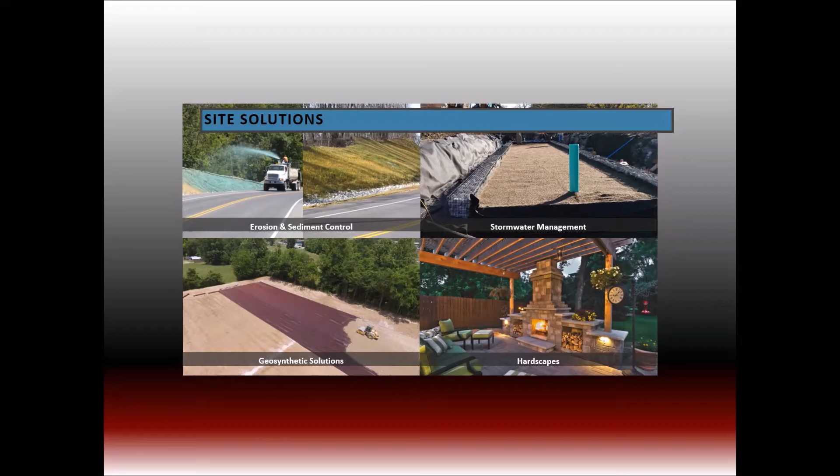We do a lot more than just stormwater management and vegetated solutions. We do a lot of erosion control and sediment control. We have a lot of hardscapes in the way of patios, retaining walls, and outdoor living. And our geosynthetics division keeps us going every day. So we have trucks and warehouses full of rolled products that have our erosion control products, TRMs, geosynthetics and geogrids, our BMPs. We help with a lot of SWPPP maintenance and compliance. So there's a whole lot of things that we offer.

One of the things we're blessed with is our warehouse staff and our trucking. We have a fleet of trucks, large and small, that can deliver a vast variety of products to your site when you need it. That makes us a one-stop shop for a lot of contractors. So we have all of our local companies that you know that you could reach out to. I'm available for any of these companies, any of our states.

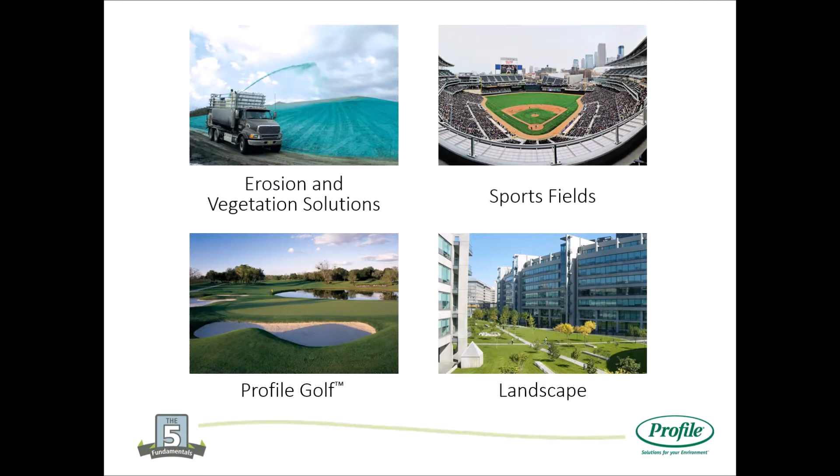At Profile, we work in a few different green technology areas. Our main focus and what we'll be reviewing today is erosion and vegetation solutions. However, we do develop solutions for sports fields, Profile Golf, as well as landscape and horticulture. But today we're really going to be focusing on erosion and vegetation solutions.

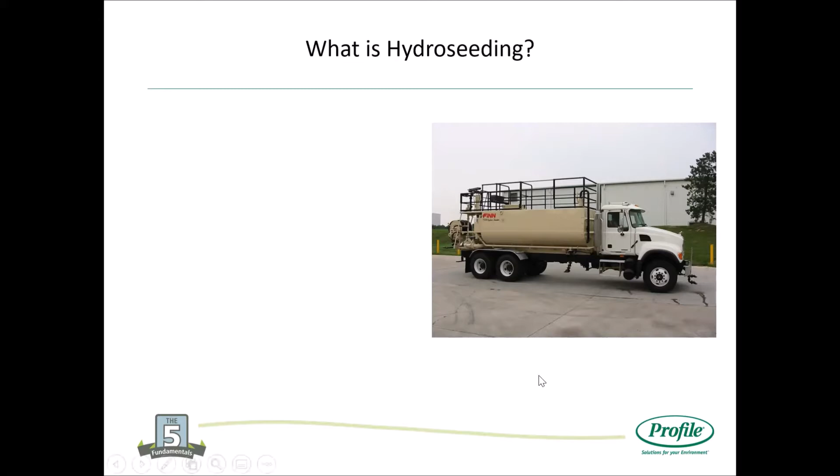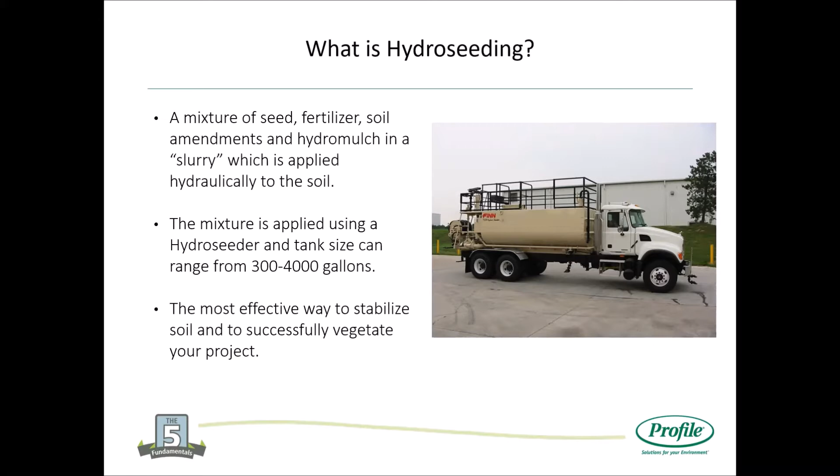I'm hoping everyone here today is pretty well versed in hydroseeding, but just in case, let's make sure we're all on the same page. When I'm talking about hydroseeding, we're talking about a mixture of seed, fertilizer, soil amendments, and hydromulch, which can be mixed into a slurry with a hydroseeder machine, then hydraulically applied to the soil. This slurry can be applied with a wide range of equipment suited for different size projects, and it's an extremely effective way to stabilize your soil and successfully vegetate your project with one application.

Today I'm going to go through our 5 fundamental processes, which is essentially our best management practice for reclaiming erosion projects. First, creating optimal soil conditions. Second, picking appropriate plant species for your site. Then selecting the correct erosion control material. Number 4, ensuring proper installation. And 5, follow-up inspection and maintenance.

Today I'm really going to hone in on 1 and 3, but I will say all 5 of these fundamentals are extremely important. I want to make sure to stay within the hour so you guys can go get your shamrock shake or pick up your green beer today. So with that, we'll get rolling.

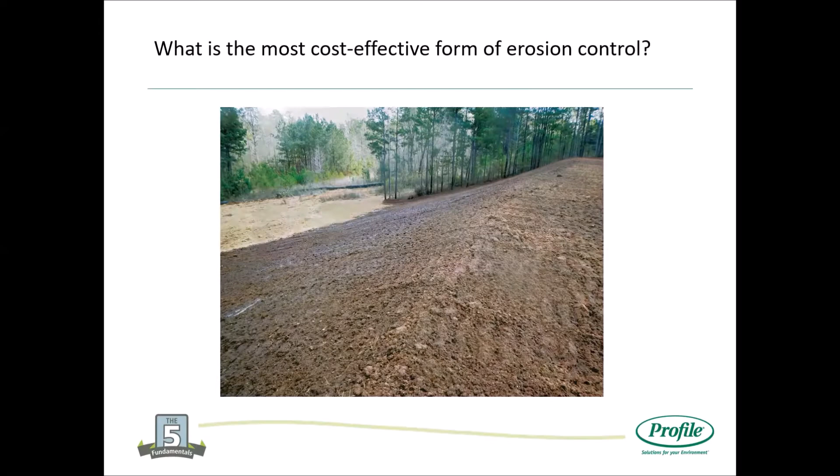If any of you have seen a presentation from Profile before, this should look pretty familiar. One of the questions I really like to start with is, what's the most cost-effective form of erosion control? I'm hoping you guys are jumping up and down out of your seats at home, but the answer we're really looking for here is sustainable vegetation.

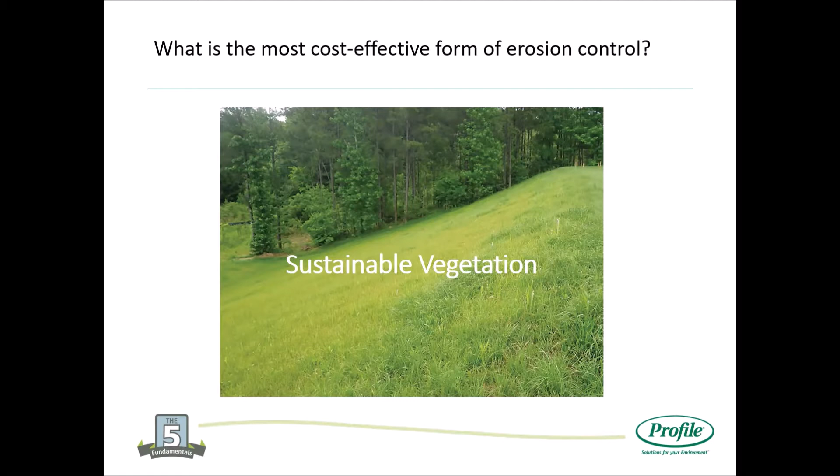This is vegetation once it's been established, it's able to persist through nutrient cycling. And in order to do that, we're going to need healthy soil.

Profile is a manufacturer of erosion control products, so why am I talking about soil health? Well, we've determined that the most cost-effective form of long-term erosion control is sustainable vegetation. With that long-term goal, that's the minimal cost, low maintenance solution. We need that healthy vegetation with nutrient cycling, diverse species, prolific roots that keep the sediment in place. But we can't achieve those unless we start with healthy soil as our foundation. This is necessary to support vegetation establishment and allow that vegetation to come back season after season.

So we know this is the foundation, but how can you tell if your soil is healthy? Can you grab a handful and see the nutrients or pH? Unfortunately, we can't. So the first thing we always recommend on any sort of reclamation project is getting a soil test.

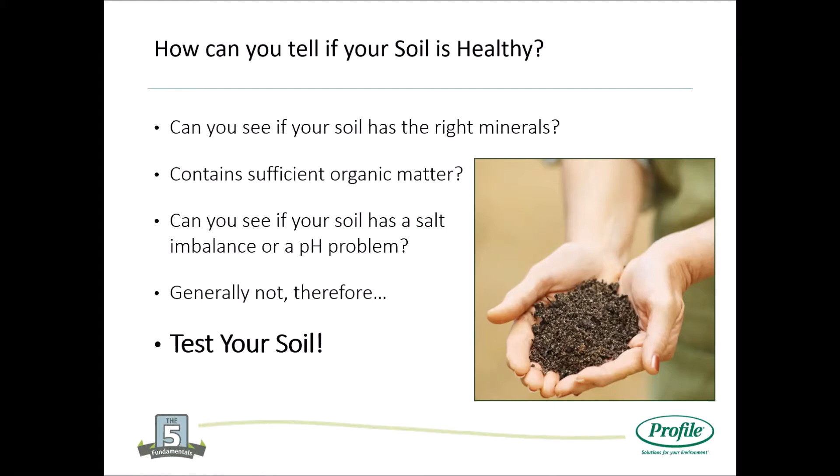That takes us into our first fundamental, which is creating optimal soil conditions. We need to make sure we have healthy soil to support that vegetation and long-term goal. By doing the soil test, we can evaluate our soil fertility. A soil test looks at agronomic potential, not geotechnical stability, so we can figure out if and what amendments are necessary to improve soil health. By doing this soil test, we can diagnose any potential issues and prescribe solutions for that specific site. This is a great way to set up realistic expectations, see if there's anything that's going to be a hindrance on the front end, and predict your desired outcome.

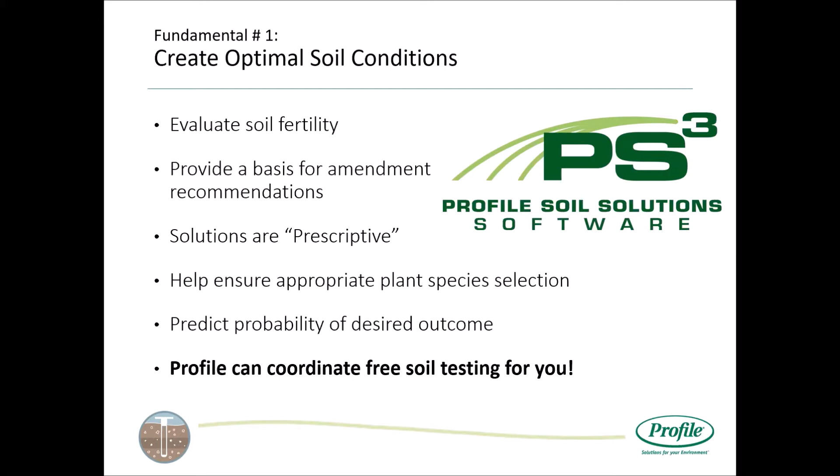At Profile, we understand how critical this is to the success of your site, so we actually provide free soil testing for reclamation projects. That's done through PS Cubed, our Profile Soil Solutions Software.

So I mentioned we're doing an agronomic soil test. What do we need to look at? Here we can see some of the general parameters we typically like to review from a soil test: water, salts, pH, our macro and micronutrients, as well as any potential heavy metals or toxicities.

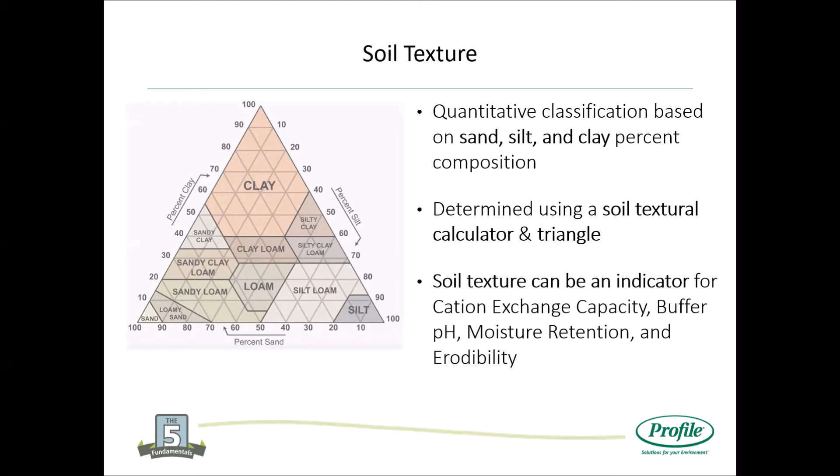Organic matter is going to be a really key parameter that I stress on here today. Also taking a look at our soil texture, so our breakdown of sand, silt, and clay. This is a key indicator for our cation exchange capacity, as well as erodibility. So certainly something to keep in mind.

But like I said, we provide free soil testing through our PS Cubed software. Here's just a quick example of what that looks like. As you can see, it's a pretty robust analysis going through all those parameters that I previously shared. Goes pretty well in depth.

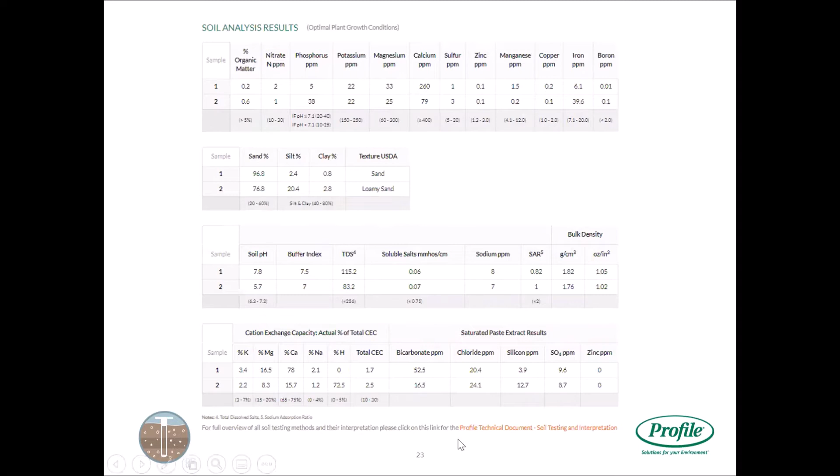We do all of our testing through a third-party laboratory. They upload the results directly to your account, but along with providing results, we also provide prescriptive recommendations as well. So depending on the range that your parameters fall in, we can then prescribe soil neutralizers if we need to modify that pH, or growth stimulants, biotic soil media—these are going to be determined on the salt levels and organic matter in your soil. But here we can really see how we can use this soil test to review our site.

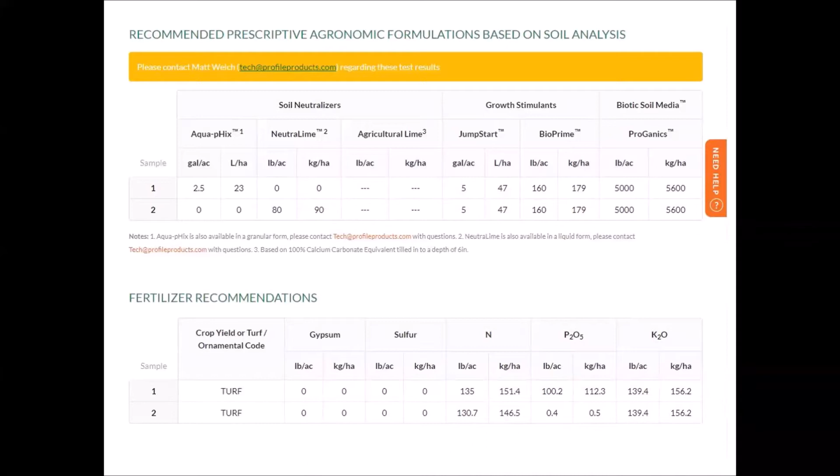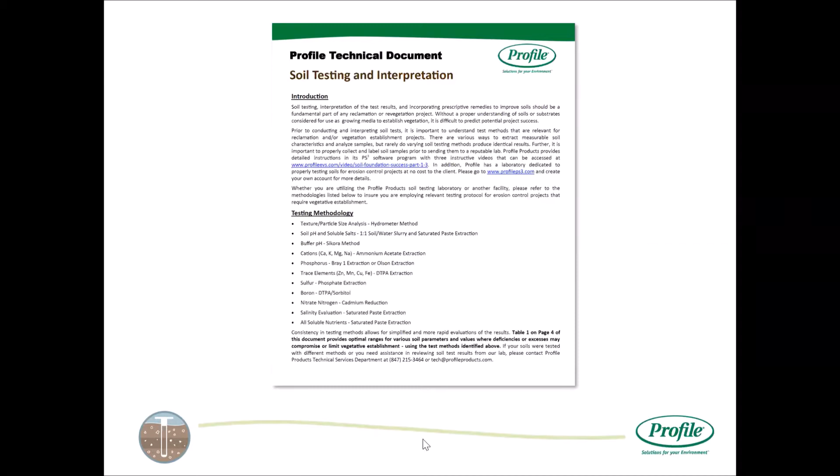And then prescribe specific solutions to improve our vegetation outcome. But also with those results, it's not very helpful if you don't know what you're looking at. So we do have a soil testing and interpretation guide linked with all of the results. It goes through our testing methodology and gives you a little bit more background on what you're reviewing. Or if you have any questions, call me. That's my job. I'd be more than happy to review these results with you and see what we can do to improve the potential outcome for our sites.

So first fundamental: getting that soil test, submitting it, you get it back and you see we're kind of lacking some nutrients. So how do you actually go about fixing poor soil? Here are the pretty common solutions: incorporating a starter fertilizer with your hydraulic slurry, soil neutralizers when necessary, increasing organic matter—as you'll see soon, this is a key component of healthy soil. That's a pretty common approach, as well as incorporating growth stimulants and enhancers.

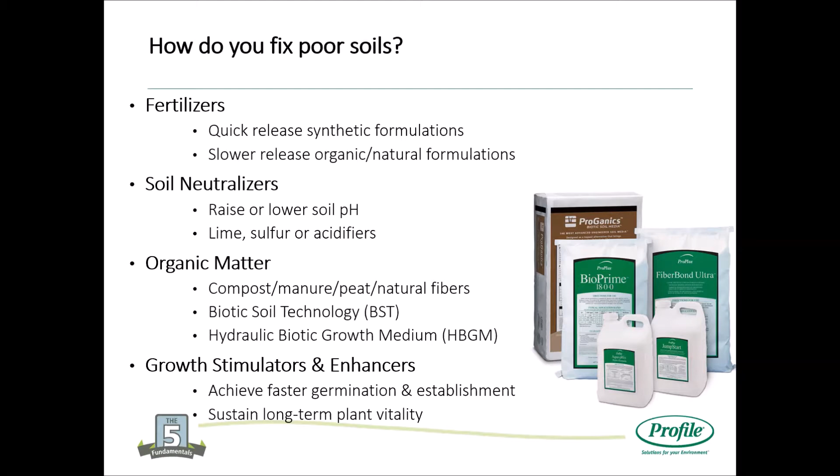So I do want to take a quick minute and touch on pH, because whenever I get a soil test back, the first two things my eyes go to are pH and organic matter. pH especially, because it can sometimes be a silent killer out on your job—second to moisture, this is going to have the biggest impact on nutrient availability to your vegetation. We typically want to be within a 6.3 to 7.3 range, because this is really where your nutrients are going to be most available for uptake.

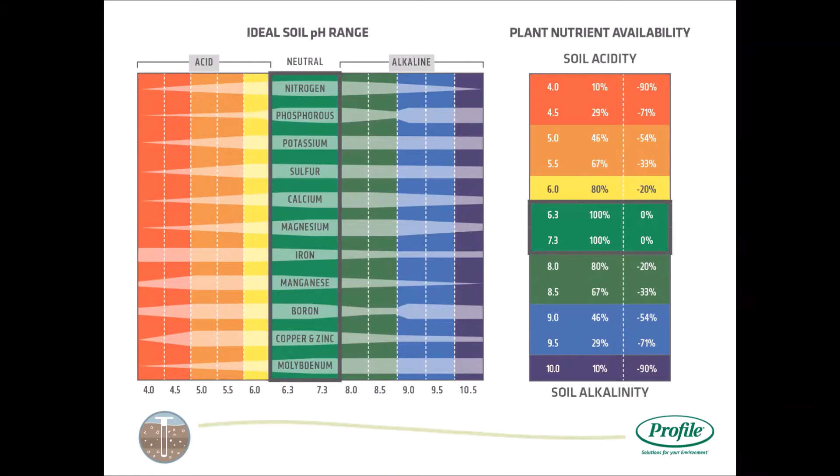But as we skew more acidic or more alkaline, we can see that some of those nutrients become less and less available. Another way of thinking about it: if you look at the chart to the right, let's say our soil test comes in a little acidic at 5.5. With a pH of 5.5, only 67% of nutrients are going to be available for uptake to your plants, or 33% simply aren't available because of the pH. So think of buying all this fertilizer and dumping 33% away because it's wasted. Whatever you can do to modify that pH when you're seeding is going to have huge impacts on your vegetation establishment.

And this is what we start every job with, right?

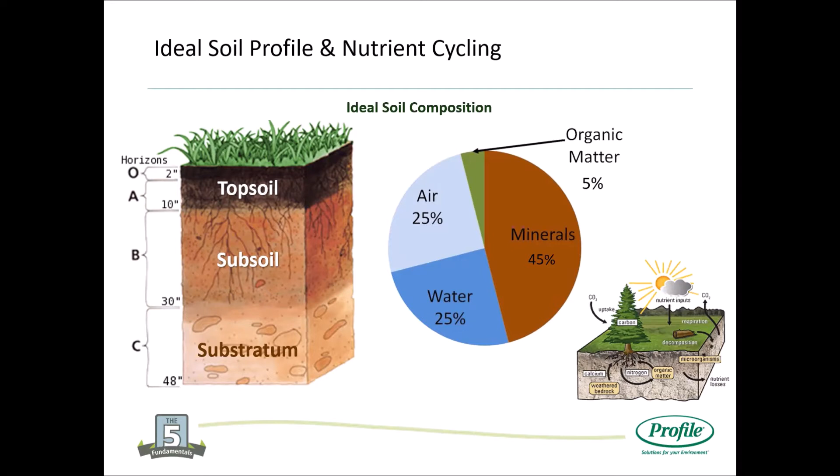Absolutely not. Unfortunately, on almost all construction sites, that topsoil layer is the first thing stripped away. It's stripped away, sent off to another job, potentially stockpiled if there's room, or it was never there to begin with. So when we're wrapping up a job and getting to the seeding component of the spec, what we're left with is commonly our B and C horizon.

By doing that soil test, we see that our organic matter is more times than not well below 1%. And we're dealing with, it's pretty common to see high salt levels. Depending on the type of job, we could be dealing with mine waste, industrial waste, or CCRs. So overall, not nearly as nice a starting position as the profile we saw in the previous slide, right?

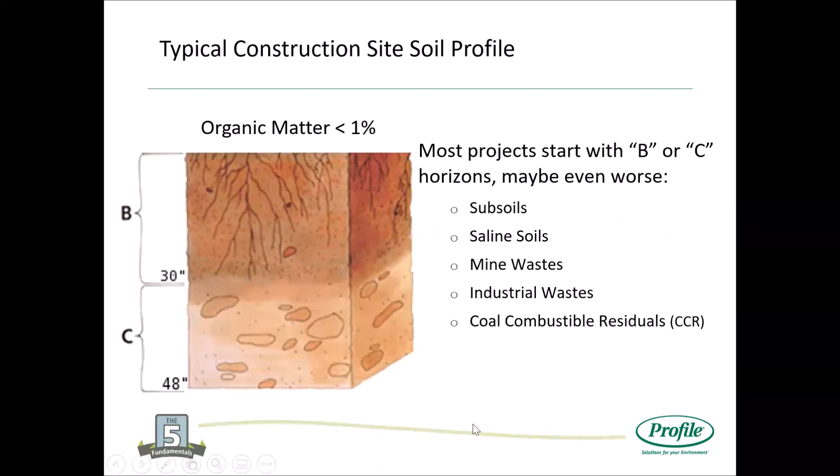So if this is our starting point and that soil test shows our organic matter is low, how do we increase it? These are the pretty common industry solutions right now, most commonly topsoil and compost. Hauling in this material to your site and spreading or incorporating it is a pretty common practice to increase your organic matter. But with that, it can be pretty difficult to find quality material, or something within your budget. It can be too far away, or unavailable.

So that led to two typical solutions we were seeing. If there's no quality material or it's too costly, we were seeing people just using the existing subsoil and hoping for the best, or a term I've heard quite frequently, the spray and pray approach. It's got a nice ring to it, but it doesn't necessarily give you the best results, right? It's going to be one of the primary causes of project failures.

Or the other option was they would have to take a hit to the budget and haul in and spread the topsoil or compost, which was pretty common, but a crazy solution if you're having to spend all that extra money just to raise your organic matter.

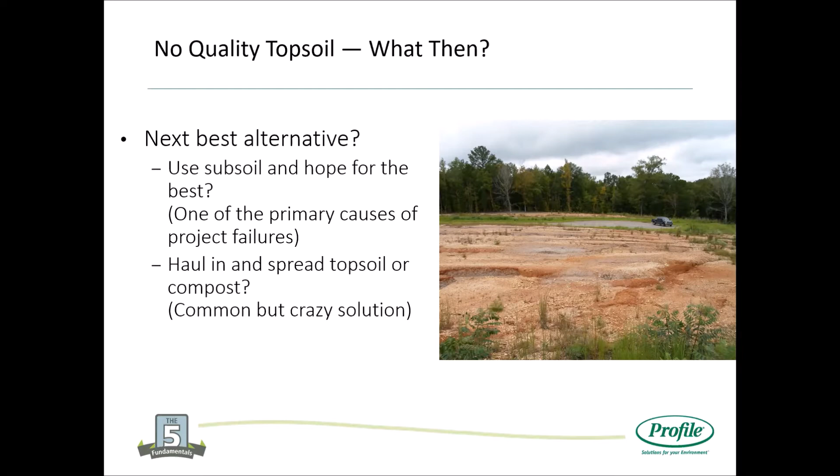So seeing these common issues and common approaches within our industry, that's what led Profile to develop a hydraulically applied biotic soil media. This hydraulically applied solution is designed as an alternative to compost or topsoil, designed to jumpstart the soil's biological activity in depleted soils. So using our standard hydroseeder that we saw earlier in this presentation, we can now use that for erosion control and also increasing our organic matter.

Given the nature of this application, it's going to reduce site traffic and improve site safety, dramatically reduce installation times, and is much easier and safer to apply on slopes. And since the launch of this technology, we have proven performance qualitatively and quantitatively, improving vegetation establishment equal or better to incorporated compost and imported topsoil.

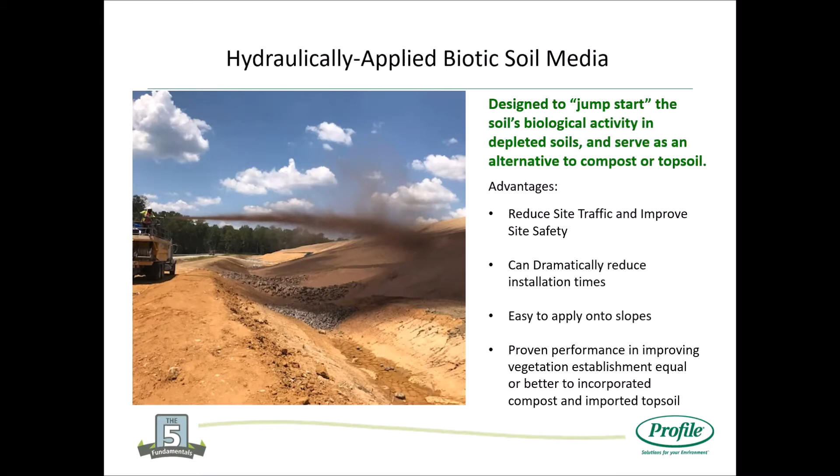So the product we manufacture is ProGanics Biotic Soil Media. This is a concentrated formula since it's hydraulically applied. We achieve this concentrated high organic matter through renewable, thermally refined bark and wood fibers. These fibers are phytosanitized, provide very high organic matter, and you lose the risk of incorporating weed seeds or pathogens as it goes under this high heat process.

From there, it is loaded up with soil building components: our porous ceramics, biochar, beneficial bacteria, endomycorrhiza, humic acid, seaweed extract. These all work together to help rebuild your soil profile.

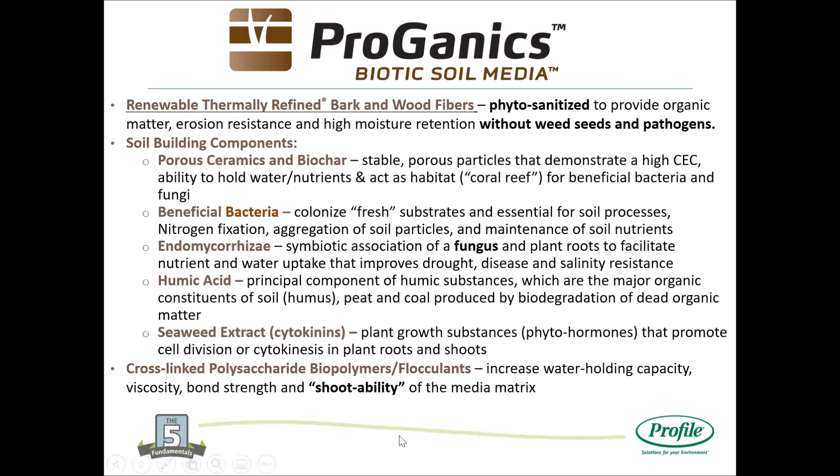We also have a polysaccharide biopolymer, which helps with the shootability, as this is a hydraulically applied solution. So, a very concentrated formula since it is hydraulically applied. Think of it as spraying the fertility of a topsoil just without the sand, silt, and clay.

This ProGanics can then interact with the existing sand, silt, and clay on the current substrate. Once it's been applied, it's going to improve the soil chemistry. Over time, that helps improve the structure and texture with the increased organic matter from the wood and bark fibers. And with the soil building components, it creates a more ideal growing platform for that vegetation to take off and allow that subsequent nutrient cycling process. So essentially, over time, applying this type of technology provides the soil with all the ingredients to jumpstart this process and rebuild your topsoil layer in place over time.

One of the great benefits with this technology is that it's manufactured to a specification. It comes prepackaged in bales, just like our hydraulically applied erosion control products, but you're going to have a consistent product, bale after bale, 365. That's certainly one of the concerns with some of the other options within our industry, but this is a consistent solution. Break it up into your hydroseeder, incorporate your fertilizer, seed, or other amendments, mix up this slurry, and spray it out onto your site.

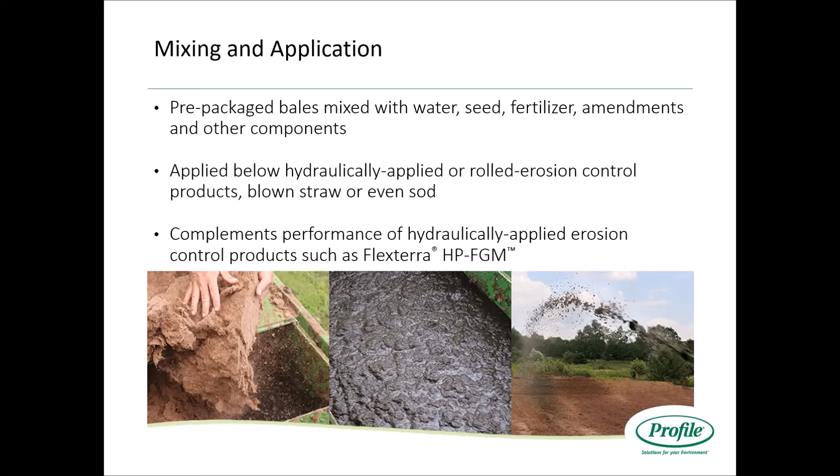There are certainly a lot of considerations to regenerate your soils. Probably the industry leading solutions right now are topsoil and compost, and they certainly still have a place within our industry. But I'd like to stress, the next job you have where you're struggling to establish vegetation, and organic matter is low, consider ProGanics Biotic Soil Media as an alternative to really start rebuilding that soil. It's a consistent product, easy and safe to apply on steep slopes, and no concerns with bringing in outside weed seeds or pathogens.

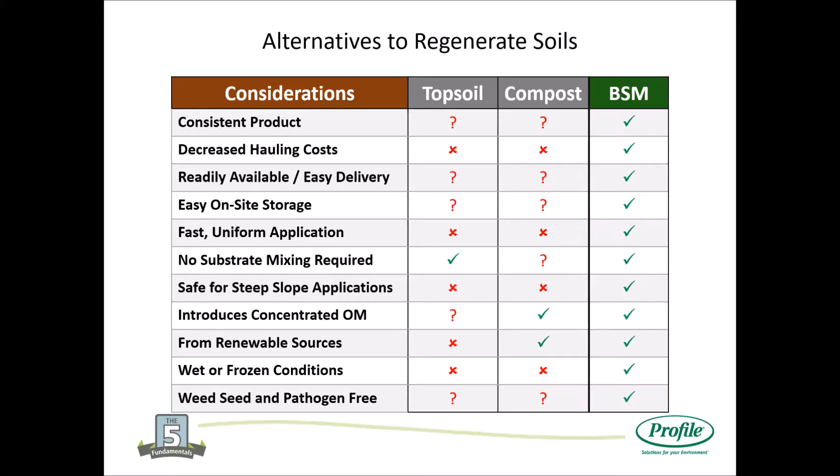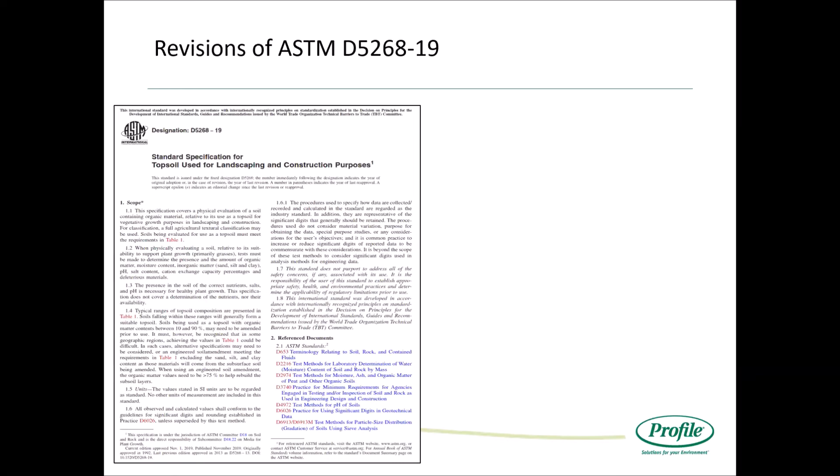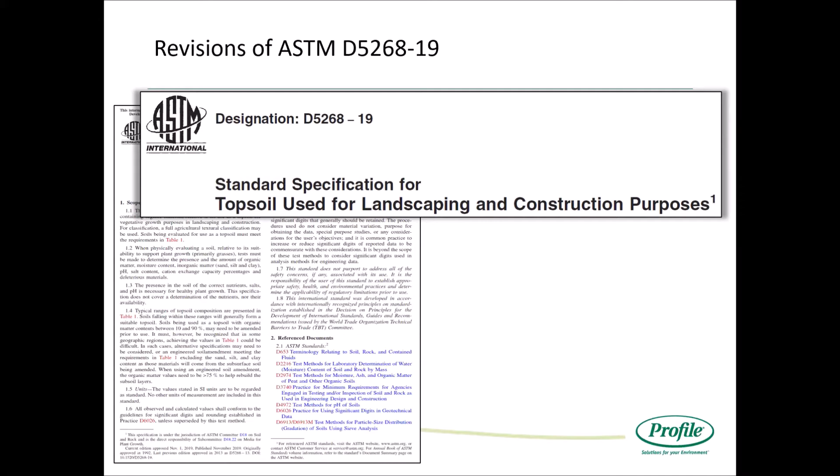This has been a newer technology within our industry, but it's certainly being accepted by a wide range of DOTs and other specifying agencies. For example, ASTM International just revised their topsoil specification, really revamping the requirements for what's necessary of a quality topsoil. Ideally, even Profile would recommend organically rich topsoil, but there simply isn't enough available. So in this spec, they introduce a hydraulically applied engineered soil amendment as an alternative to topsoil, because they recognize quality topsoil is a limited resource. When we don't have that, an engineered soil amendment is a great alternative. And with the requirements they specify, ProGanics BSM does in fact meet that spec.

So first, fundamental number one: really making sure that we're doing that soil test and doing what we can to create optimal soil conditions. Fundamental number two: picking the right plant species.

There's quite a few considerations when it comes to picking your plant species. Is it permanent or temporary? When is our installation going to occur? The intended application, site characteristics, maintenance, our soil test, what seed mix is going to be suitable to the potential high salts or pH range. There's quite a few considerations that you need to look into when you're picking an appropriate seed mix.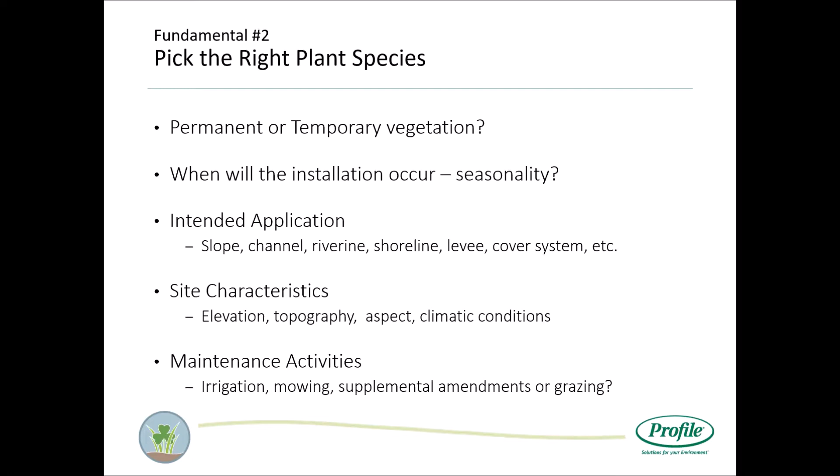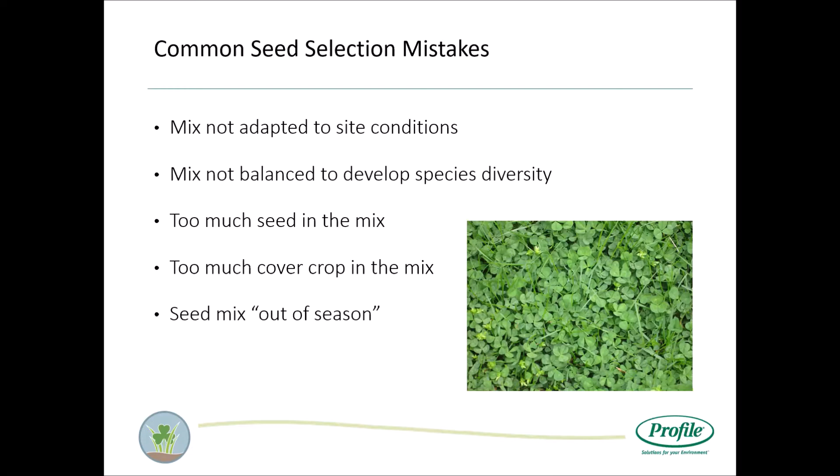Some pretty common mistakes we see from our perspective are that a lot of times your seed mix may not be adapted to your site conditions, or it's not balanced, so there's not any species diversity. You can potentially have too much seed, or too much cover crop. And of course, seasonality. This probably doesn't sound too new to you, but even though we're not going to stress too much time on this fundamental today, it is really important that you select a seed mix that is going to be well adapted to your site and your intentions.

At Profile, we always like to recommend going with your local distributors or seed suppliers and asking them for their recommendations. NRCS and DOTs and other specifying agencies also provide great references for seed mixes. Always keep that in mind and keep good records of performance, and that's certainly going to help you out on projects down the line.

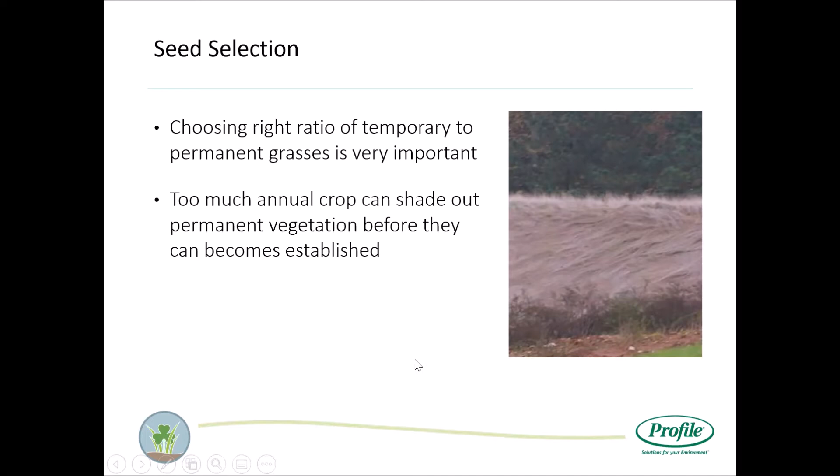Because as we can see in this picture, you can have the right mix, but if you have the wrong ratio, your temporary cover crop can fully get established and actually shade out your permanent vegetation before it can become established. And when that happens, you're going to have to go reseed anyway. So certainly don't overlook this second fundamental, it's really critical to success.

And then, lastly, seasonality of installation. Even though I'm looking out my window right now in Denver and I see a bunch of snow on the ground, the first day of spring is this weekend. So make sure that you're going with the appropriate mix for your time of installation.

All right, so fundamental number 3, selecting the right erosion control material.

When it comes to selecting an appropriate erosion control BMP, we like to think of it as finding a way to balance your site's natural variables and your product attributes. By natural variables, I'm talking about your soil, water, and vegetation. We could have potentially tried to improve our soil, but the vegetation is what's going to thrive in that area, and water's more about precipitation for that region unless we're irrigating. So we need to make sure that the erosion control BMP can complement those site constraints and provide adequate protection.

So erosion control effectiveness is key, making sure it can withstand the potential erosion. Functional longevity is very important and commonly overlooked. This really references how long this product is designed to provide protection. So for hydraulically applied erosion control products, how long is this designed to protect the seed and soil before that seed can really take off? Certainly a major component when it comes to dormant applications, as well as native seeding, as those typically take quite a bit longer to germinate.

And then last but not least, growth establishment. I said at the beginning, our most cost-effective form of erosion control is sustainable vegetation. So we want to make sure that the erosion control BMPs we're installing are going to encourage that vegetation establishment instead of hindering it.

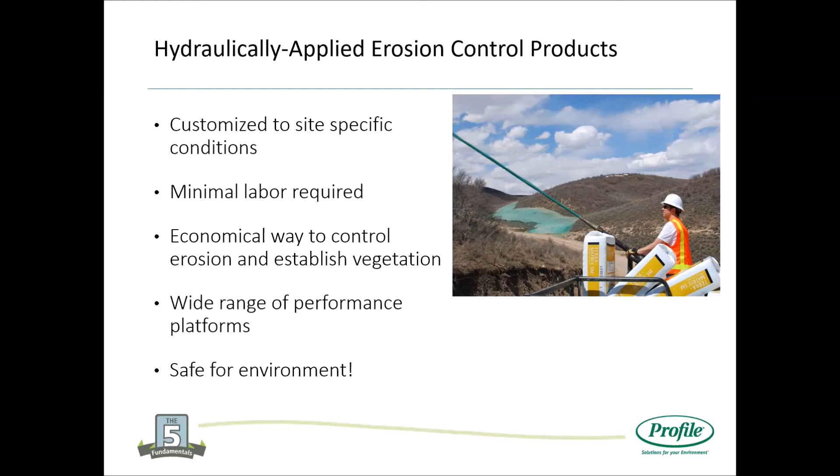And then, of course, they're safe for the environment. Certainly in years past, the industry standard was blankets and rolling those out. While it was all good intentions, sometimes in certain areas we can see that some of the netting and staples still remain today. While they certainly still do have a place and there have been advancements in those technologies, that's certainly not an issue that we need to worry about with HECPs. We've tested these through ASTM and EPA. They're 100% biodegradable, encourage that vegetation, and safe for the environment.

So a little bit more about HECPs, kind of think of them as spray-on blankets. Once they are applied to that substrate, they're going to bond with the soil and essentially lock in that seed and soil until that vegetation can germinate. And then we have that long-term solution with the root entanglement in the soil.

Inherently, with how they are applied, hydraulically applied, they're mixed with water as they're sprayed out. So once it is applied to the soil, you're kind of like spraying out a sponge onto the soil. It's going to maintain that moisture to help with germination and then protect against future rainfall impact, but it can also retain that future moisture. So really creating a great growing environment for that seed to really take off.

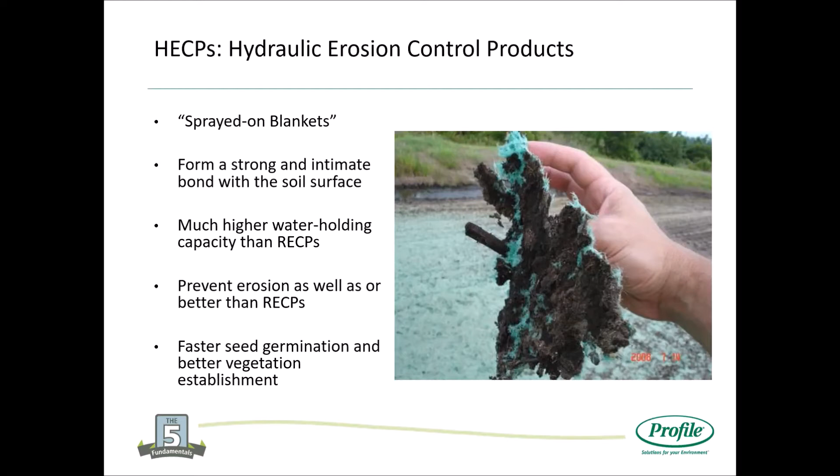And like I said, HECPs versus RECPs, rolled erosion control blankets, advancements within erosion control technologies have made netting less and less relevant for today's environment. Unfortunately, I'm sure you guys have seen a lot of pictures like this. But blankets certainly do have their place. They're ideal for channelized application where you need that reinforced protection.

So, as a company with our environmental legacy, we do suggest if you are using RECPs, try and make an effort to use that biodegradable netting.

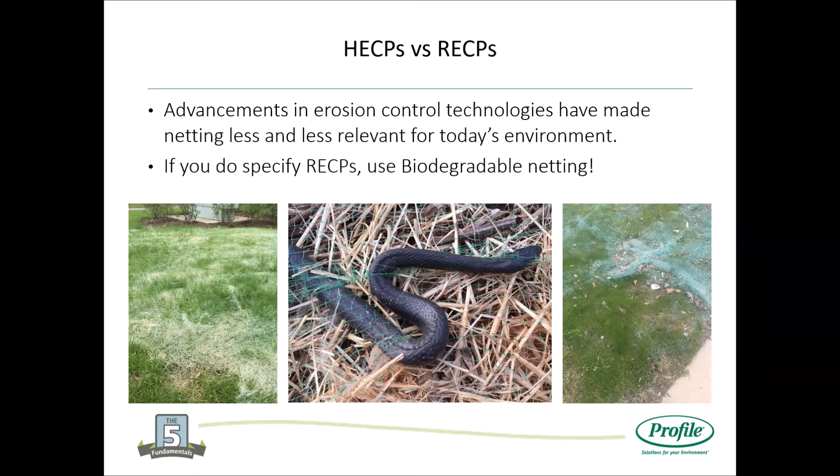In terms of erosion control selection, it's really important that our HECPs can protect against the potential erosion on our site. But how do we figure that out? We calculate potential soil loss through the Revised Universal Soil Loss Equation, or RUSLE. With this, we can calculate potential soil loss per unit area per unit time.

But in terms of an erosion control solution, where we can really come in and make a big impact on your potential erosion is our C, our cover factor, and our P, our practice factor. The C factor is calculated as the soil loss ratio of a treated surface versus an untreated surface, which we determine through rigorous rainfall testing. The P factor relates to how your soil surface is prepped. Cat tracking your slopes or leaving them rough graded actually reduces potential erosion as opposed to the more labor intensive smooth grading. So simply the way you're prepping the soil makes an impact as well.

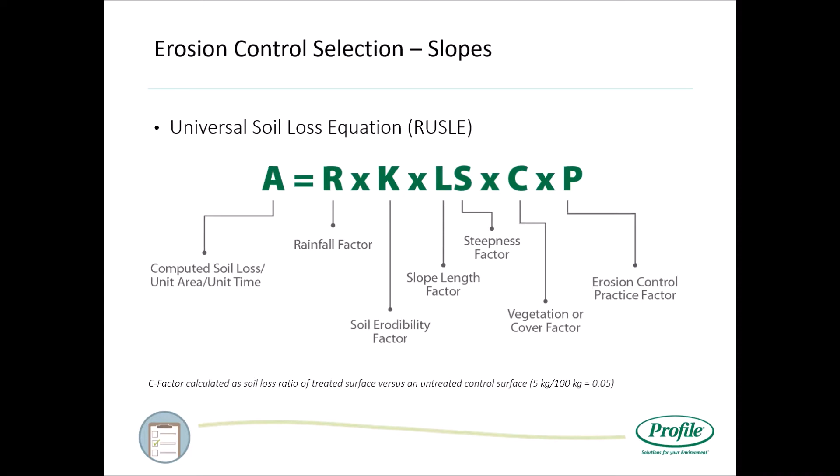In order to do that, we really like using the Utah Water Research Laboratory, because they can create the largest raindrop. The bigger the raindrop, the higher the kinetic energy and the more destruction we're going to see. So keep that in mind when reviewing products, because not all labs can create the same kind of rain. We want to use a rigorous lab to test these products to failure so we can differentiate their performance.

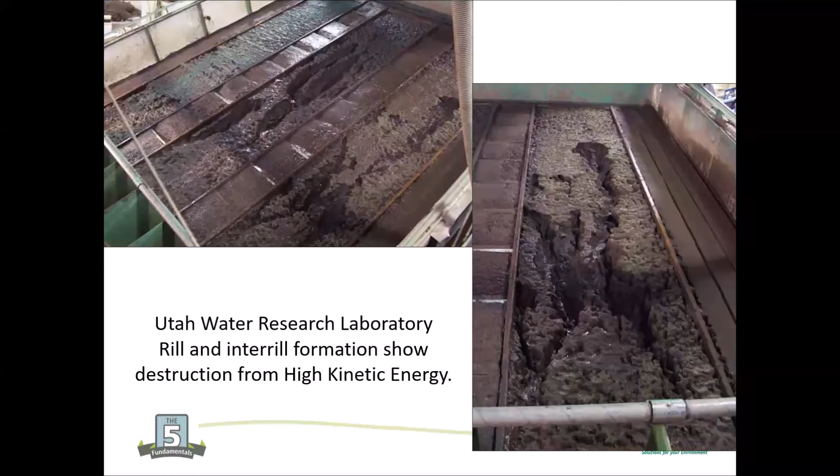From all this testing, we can then calculate what their C factor is, and again, this is related to a control. In that RUSLE equation, all those parameters are multiplied by each other, so taking us back to algebra, the smaller the C factor, the better, right?

So a smaller C factor—what we see in this top row, 0.01, relates to 99% erosion control effectiveness. Another way to look at it: if we plugged all these factors back into that equation, keeping everything else consistent, we can see the distinct differences in potential soil loss per year. A C factor of 0.1 is 90% effective—by college grading, that's still an A—but if we look at potential soil loss, it increases tenfold from the 99% effective material. Keep in mind, those changes in C factors have a really large impact on potential soil loss on your site.

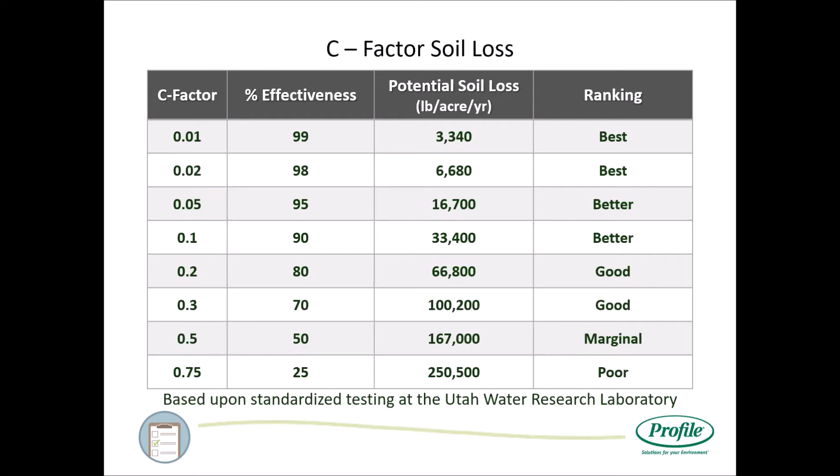By doing all this testing, we're able to differentiate products and determine what they can withstand out in the field. Here's a performance profile. At the bottom, relatively flat, we're not expecting much erosion—that's typically when you go in with a straw or base mulch. But as we're dealing with more potential erosion or steeper slopes, we certainly need to supply a higher performing material. Common sense, but how we really determine that is through that rigorous rainfall testing.

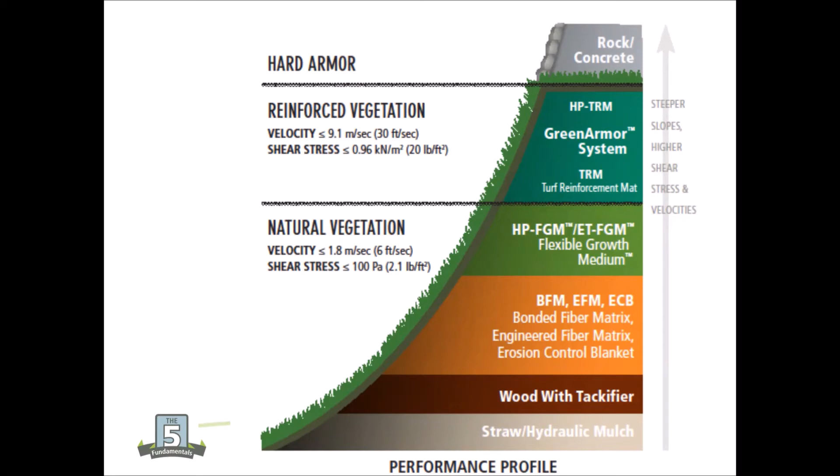The highest performing mulch available in the industry is Flexterra High Performance Flexible Growth Medium, or Flexterra HPFGM. Flexterra is composed of thermally refined wood fibers, wetting agents, including a polysaccharide-based tackifier. It's got crimped interlocking fibers, which once applied, help it all lock together and protect your seed and soil.

It's designed for slopes steeper than 1-to-1. It's greater than 99% effective at controlling erosion, and it has a functional longevity up to 18 months.

So really the ideal solution for dormant seeding or those really high potential erosion sites, or when we're trying to establish natives, which take quite a bit longer to germinate, so you need that longer protection. Also vegetation establishment - those thermally refined wood fibers hold a lot of moisture, which really helps increase vegetation establishment by 800% compared to a control. And also cure time of 0 to 2 hours, which means it's going to perform as expected immediately upon application.

So this is really the high-end, top-notch erosion control solution for those really difficult sites. In areas where we're really struggling to keep the sediment there, this is going to be your solution. Again, ideal for those steep slopes - we use it quite frequently on vertical walls and those really difficult areas.

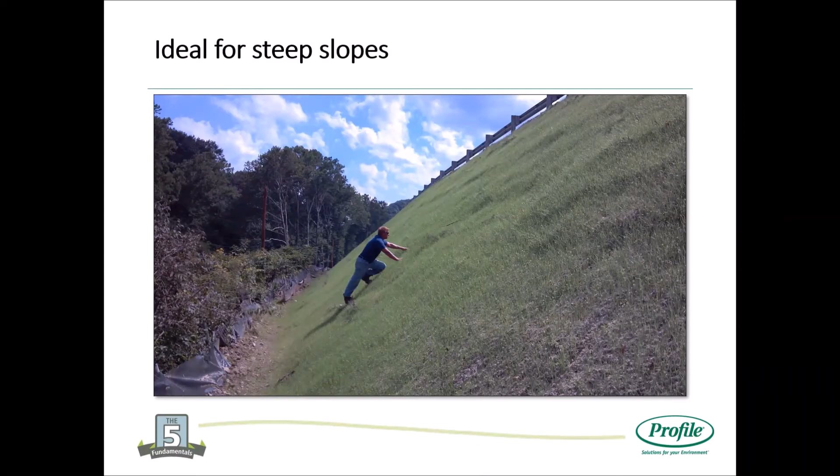So now here I've got a couple examples. Just want to say thanks to Steve with Quick Supply for sharing these. So here's a great example of when to use Flexterra.

This was the Lost Island Water Park in Waterloo, Iowa - 20 acres. We've got some steep slopes and long uninterrupted areas, and we know that slope length and steepness plays into potential erosion. So this was a great opportunity to utilize Flexterra to lock everything in place to create this vegetated mountain, which will then act as the long-term erosion control solution.

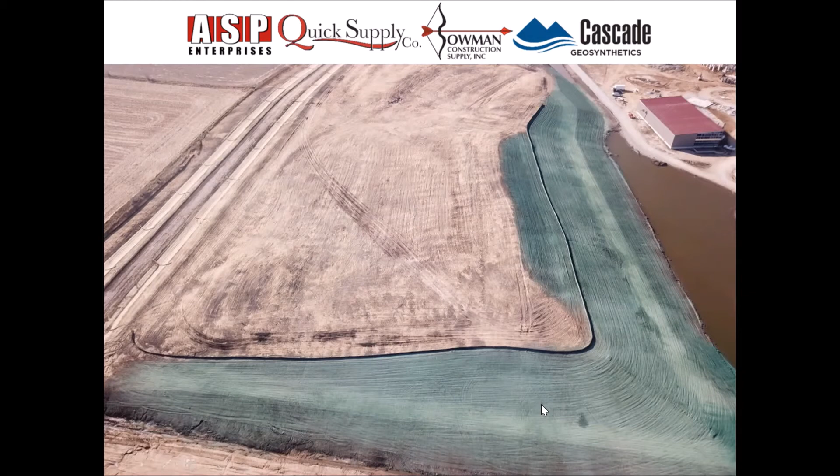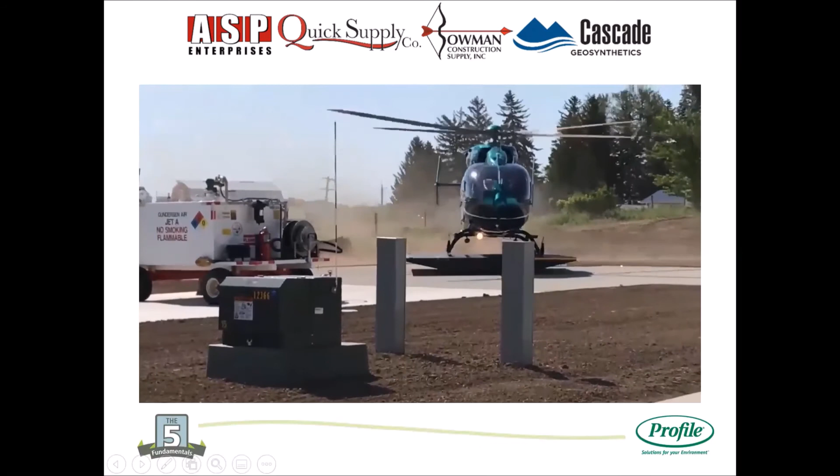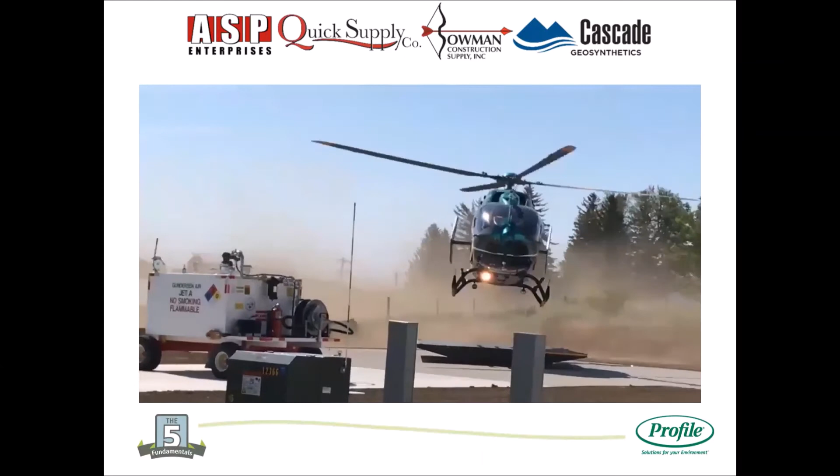Here we've got another opportunity. This was the Decorah Airport in Iowa - a helipad, and as we can see from this video, there is quite a bit of prop dust and wind erosion from this helicopter. So obviously something needed to be done here to help stabilize this soil.

So for this area, they sprayed the entire area with Flexterra HPFGM. And until that vegetation could establish, it could also act as a dust suppressant. So it's not just the go-between until that grass takes off - it really is going to be effective in that growing period.

And then after it was installed, here's another video. As we can hear... I'm sorry, I had no idea that was going to be so loud. Sorry about that. Hopefully we didn't deafen anybody. That's awesome, we kept everybody awake, my apologies.

But as we can see in this video here, we're not seeing those plumes of sediment anymore, right? So that Flexterra is really locking everything in place until that vegetation can take off.

And again, I apologize for your eardrums, but here we are with another follow-up picture where we've got all this vegetation fully established out on this site. So really for those highly erosive sites, Flexterra is a great solution there. Thanks again, Steve, for sharing these pictures.

And that was Bill's fault for making it loud, I didn't check the audio. Sorry about that. Well, hopefully - go ahead. I was just gonna say, hopefully everybody's still with us. Yeah, well, I'll take the complaints, I am the complaint department too.

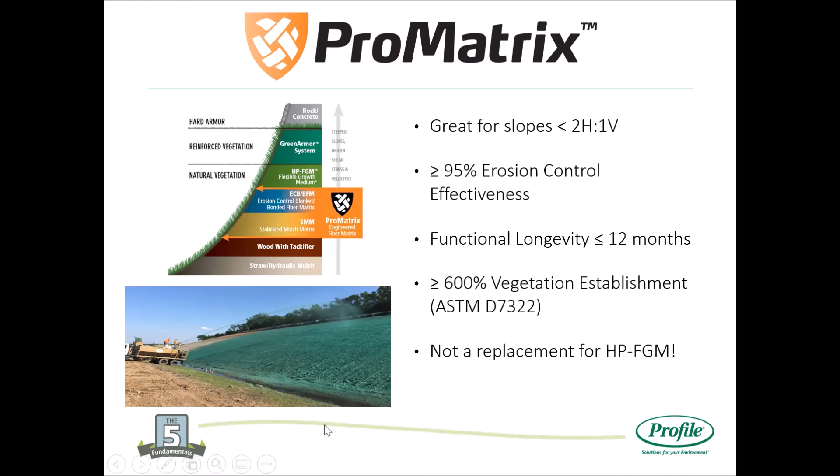Just really wanted to stress Flexterra is a great solution, but there's certainly some other options. When we don't have as much expected erosion potential, go further down the profile, there's some other great solutions. So we don't always need to go in with the Cadillac solution, but it certainly doesn't hurt to provide that adequate protection.

But with so many products to choose from, that can make it a little difficult to make that selection. So I do want to reference erosioncontrolspecs.com. This is a great website to develop your own specifications, as well as compare performance properties of other materials to make sure that you're going to have adequate protection.

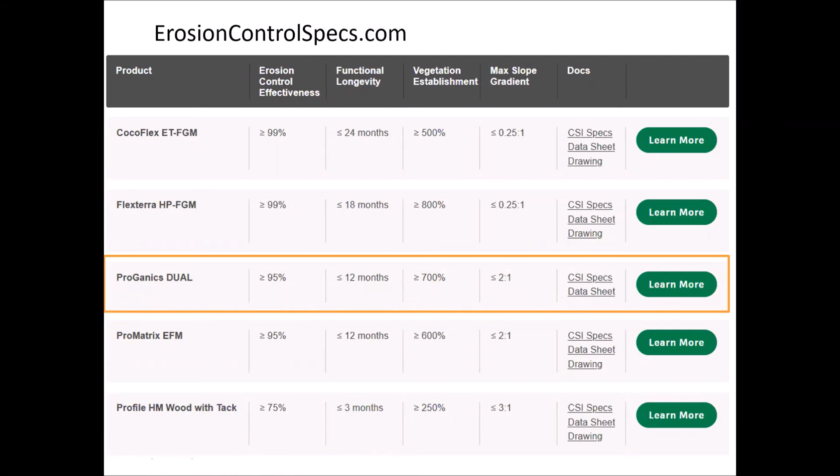And I don't know if any of these products caught your eye, but you'll notice in the erosion control section, we have a product called ProGanics Dual. And what this is, it is different than our ProGanics BSM.

After the launch of that material, we had a lot of great success with building the soil with ProGanics BSM. But we also got quite a bit of feedback from contractors and people utilizing this two-step application that they love it, but it could be better, and they'd prefer it if they could get it all in a one-step application. So that's really the intent with ProGanics Dual.

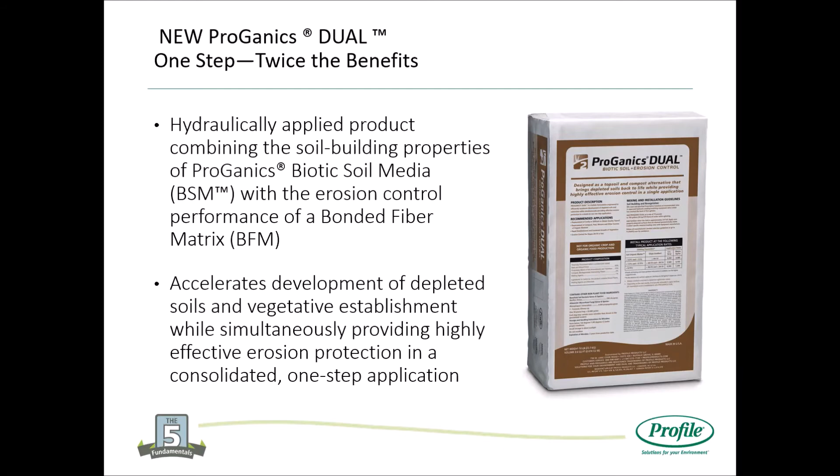It's a combination of the soil building properties of ProGanics BSM up to the erosion potential of a bonded fiber matrix or ProMatrix that you saw in the previous slide. So similar to ProGanics, it's going to help with the development of your soil health, but also protect against up to moderate erosion control potential.

So certainly has limitations. We don't really want to use it on slopes steeper than 2 to 1. But overall, it's great for areas where we have limited access and efficiency is going to be paramount to getting this site completed.

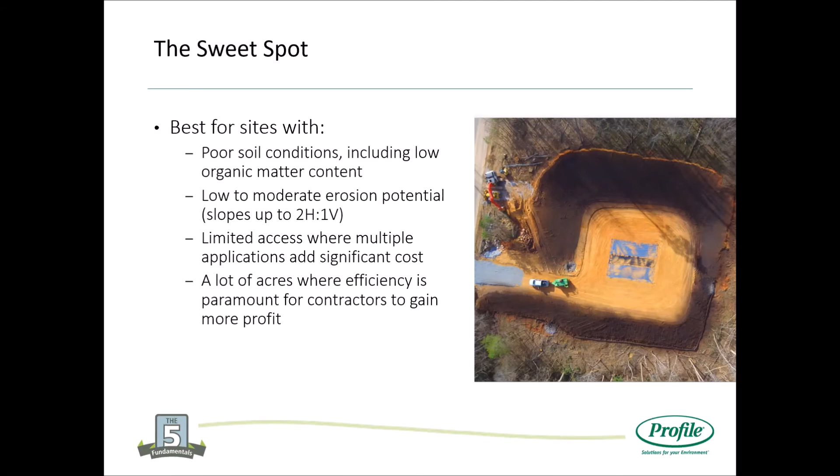So again, reducing the number of tank loads, it simplifies complex projects with the number of different products that need to be on your site, and your application rates can be adjusted for different conditions.

So in order to make that selection, you are going to be basing it off of organic matter as well as your slope gradient, because again, we're incorporating the soil building component and the erosion control potential. So you will notice that those rates are quite a bit higher than normal, but we need to have enough material to do both of those processes in one application.

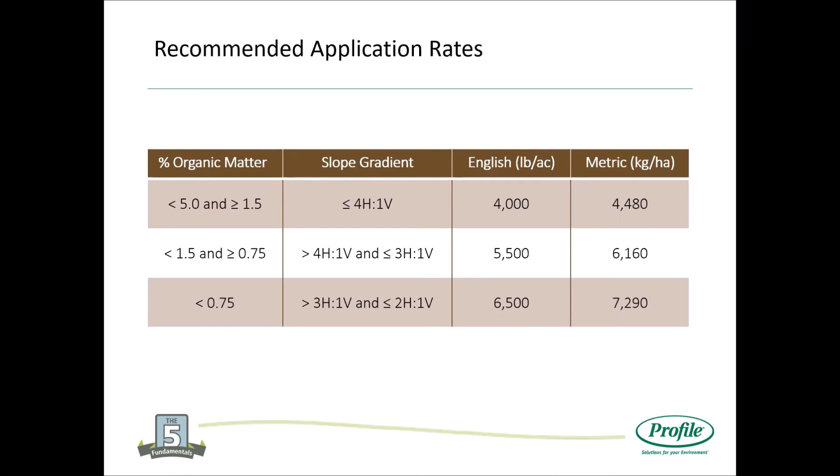So for example, here was a site down in Baton Rouge, Louisiana. This was a site that had been seeded a handful of times already, but they didn't have anything established. So first thing we did was collect that soil sample. We saw that the organic matter was well below 5%. And given the moderate slopes here, we figured this would be a great opportunity for Dual.

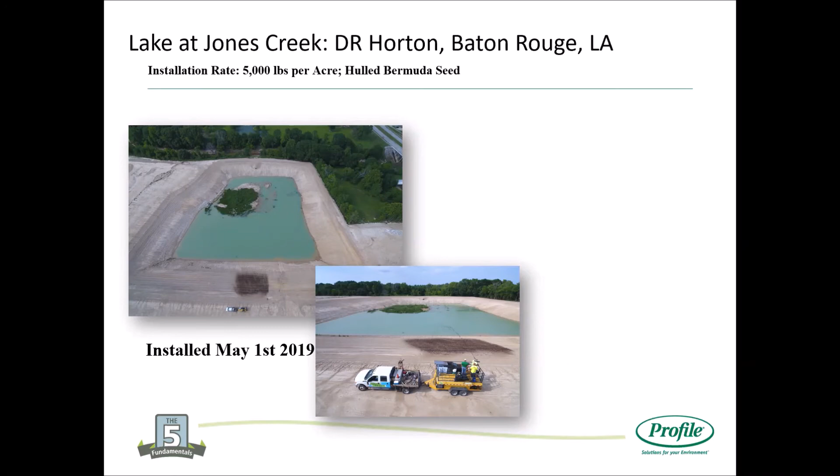So think of ProGanics Dual as a potential time-saving solution, but do keep in mind, it's not a one-all be-all. It certainly has its own limitations. We don't want to use it on slopes steeper than 2 to 1, and for those substrates with extremely degraded conditions that aren't going to be suitable for that veg establishment.

So in those situations, reverting back to the standard two-step application - one, ProGanics BSM, and then capped with Flexterra. That's certainly going to be the better option. But like I said, in those mild scenarios, ProGanics Dual is a potential great time saver for that installation.

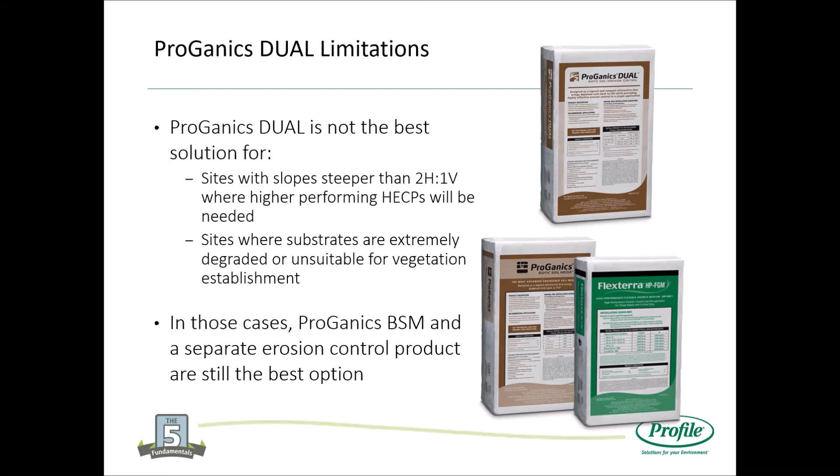All right, so we're going to fly through these last two fundamentals. I've got plenty of information and could talk all day about these, so please reach out with any other questions. But for proper installation, you can have all the right materials, but if they aren't installed or mixed appropriately, they will not perform as intended. So proper installation is critical.

So having that experience is going to be the best option there. Please reach out, anyone with the ASP family or profile would be happy to help there. And there's quite a few tools to help ensure that you are having an appropriate mix and everything there.

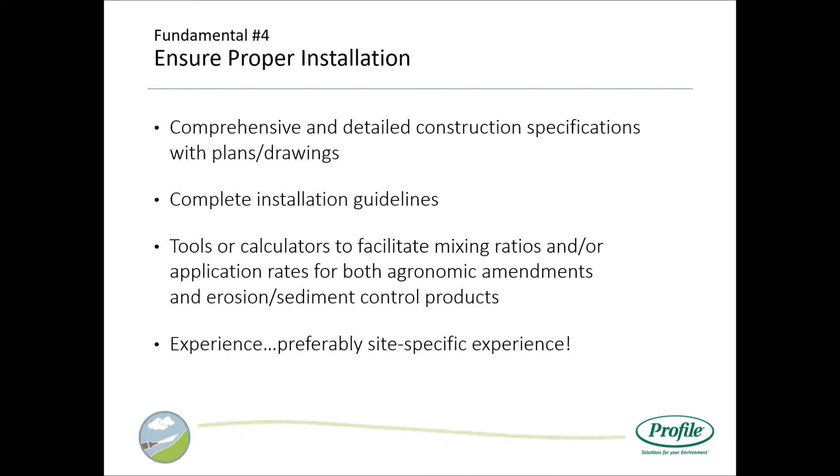So quite a few considerations with proper installation. Please reach out, there's more than enough resources to help ensure that everything's being installed correctly. And then last, the 5th fundamental is follow-up inspection and maintenance. You can have all the right tools and have everything go together, but unfortunately, we can't control the weather yet.

So making sure that inspections are happening by qualified professionals who know what to look for, and that they're happening within appropriate intervals or after significant rain events. We really want to catch any potential problems before they can grow.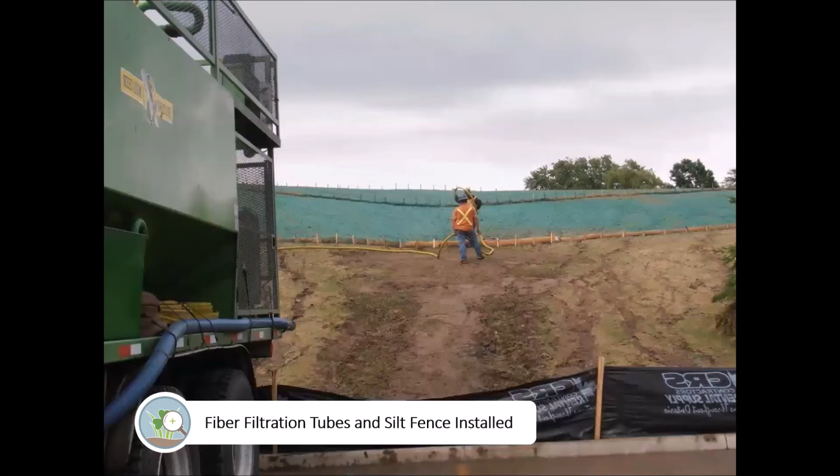Returning to the site, there were a few things overlooked. There was no perimeter control, no slope interruption devices, and we had some compaction there in the middle. So certainly regrading and taking a better approach here to achieve sustainable vegetation.

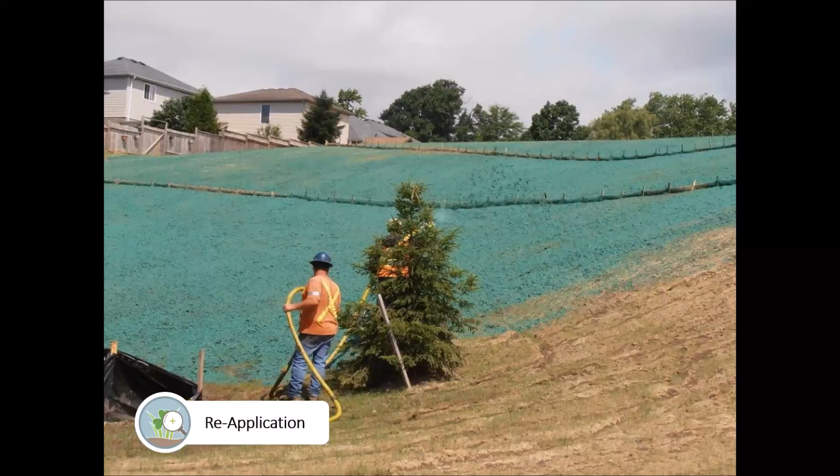So here's some reapplication of the site to then achieve that long-term goal of sustainable vegetation. We certainly want to avoid this whenever possible, but when necessary, make sure that you are inspecting these areas and addressing any small issues before they escalate.

All in all, that's a quick summary of our 5 fundamentals. Like I mentioned earlier, profileps3.com - if you aren't familiar with the website, please jot it down. This was created to mimic our 5 fundamental process.

This is where we facilitate soil testing, and where we have design tools and calculators to help with installation, as well as a document library with all of our product literature. This is a great tool, and I'll work with Bill to make sure this link gets sent out afterwards. I really recommend checking this website out.

And then I am just going to click through these real quick. Well, you have time, actually.

Rachel, I'm going to chime in. I like your idea. I'm going to make a note to include the link, since I know you have it there. I'll include the link to the PS3 in our SurveyMonkey summary email that we're going to send out to every attendee. And you have time - I don't see any Q&As, and that's how I want attendees to ask questions, but you must have done a great job. Why don't you fill out the rest of the time with your case studies, because they're really good. So you have 10 minutes left.

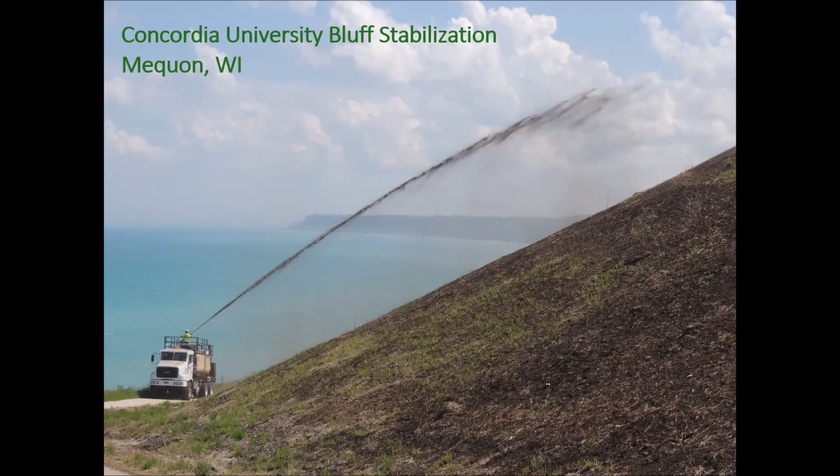So following that, they wanted to completely reclaim this area. They've got walk paths along the water body, and of course they needed to stop all the sediment going into Lake Michigan. So first thing we did was a soil test, and saw that the organic matter was pretty low. So this was a great opportunity for Proganix Biotic soil media.

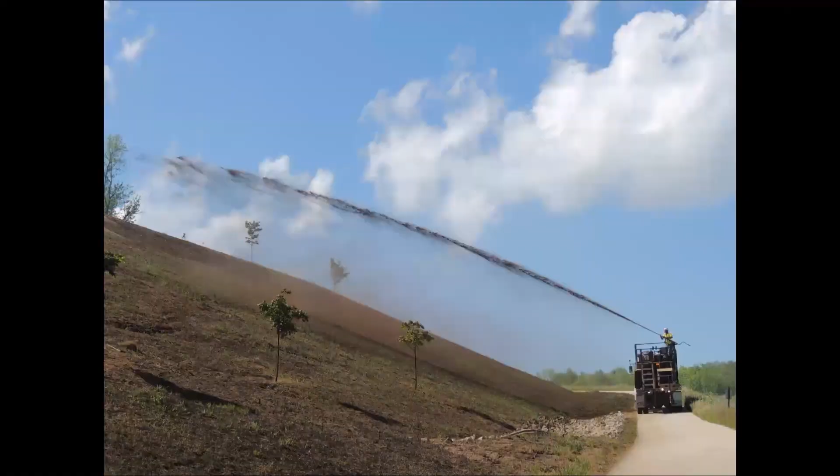As you can see in this picture, we're dealing with some pretty steep slopes. Remember, if you're trying to spread topsoil or compost, you can actually increase erosivity by doing that. So this hydraulically applied solution was much easier, faster, and safer to install to improve our soil health. So they applied Proganix all over these slopes.

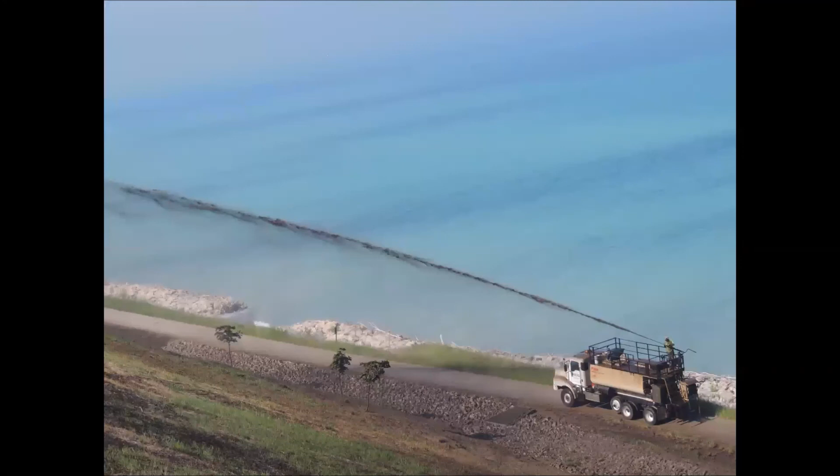After they finished the installation of the BSM layer, given the steepness of the slopes, the location of the water body, and the fact that they were going to be seeding with natives, they capped this entire area with Flexterra HPFGM - first the Proganix BSM, then completely protecting and capping these slopes with the high performance flexible growth medium.

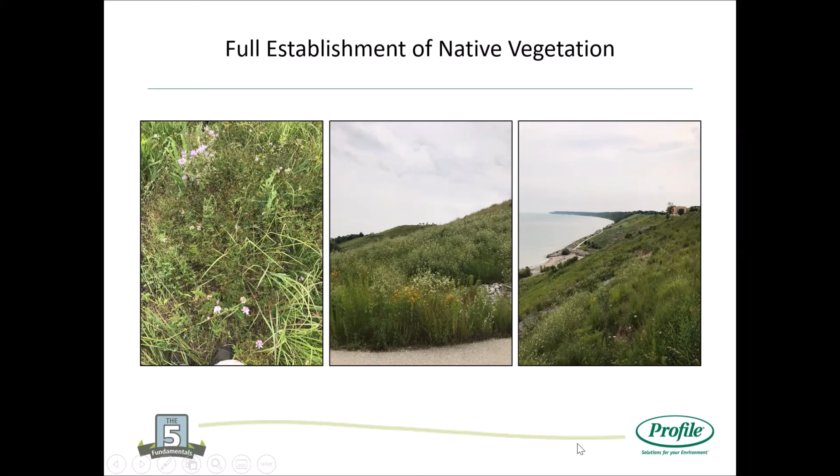So this was the first phase of the project. Coming back a year later, we've got the thick, full establishment of native vegetation. They were really pleased with how quickly this vegetation was able to take off.

Following up later that summer, all the vegetation had fully taken off and they had complete coverage. I actually got to go along to do a follow-up inspection on this site, and one of the contractors was so pleased, but he jokingly said it took off too quick - we actually have to mow it before we get into the winter months. So we certainly had that really quick green, but also sustainable vegetation.

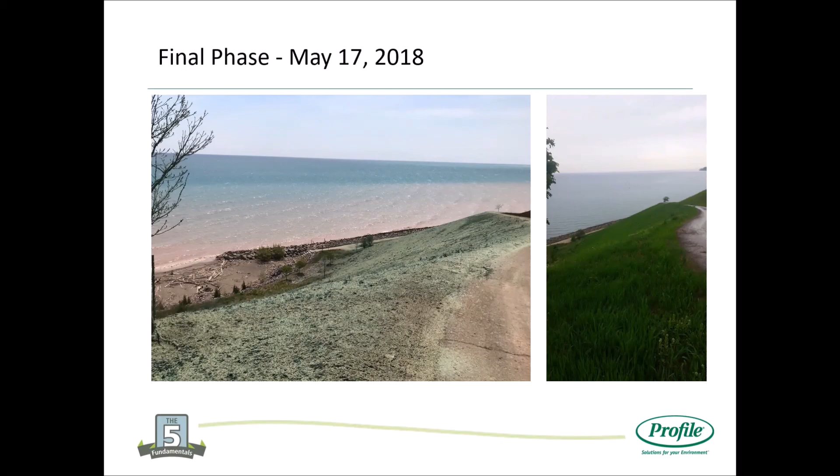So here we went the next year just to ensure that everything was sustainable and protecting sediment from Lake Michigan.

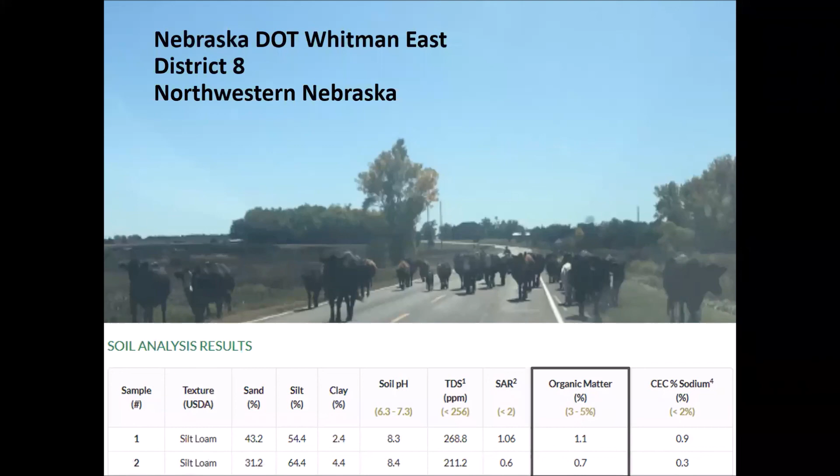The last case study I wanted to touch on is out in northwestern Nebraska. This was a project with the Nebraska DOT out in District 8. Common sources of organic matter can be seen on this screen, however they didn't have enough. We needed to come in with another solution here because we did a soil test - in this arid region, organic matter is pretty low. So we did that soil test, came up with a prescriptive solution for the roadways, and deemed this was going to be another good opportunity for Proganix.

This particular project, again in northwestern Nebraska, covered about 25 miles of roadway that they needed to reclaim. From that soil test, they knew they needed to increase that soil health to encourage vegetation establishment. So they prescribed BSM and applied it at the amended rates.

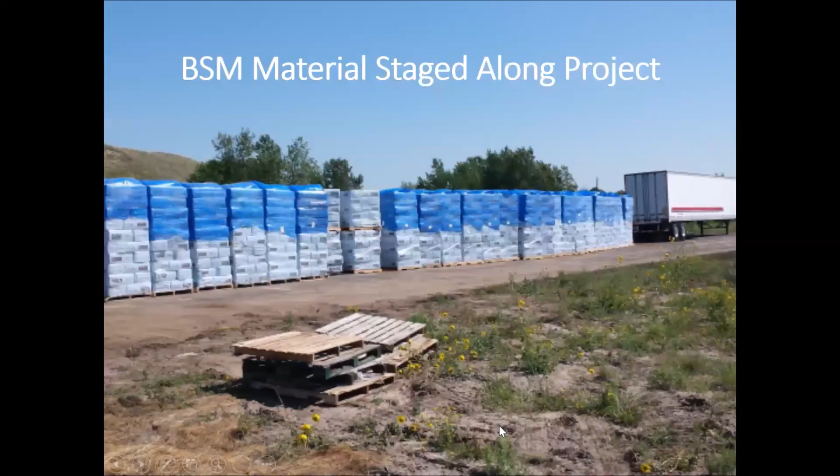You can see how quick and easy it is to apply in these applications - a lot of transportation, increasing safety. The machine gets in and out of there pretty quick, and it's an easy spraying job in these scenarios. But also, since this is a manufactured material, you have benefits with staging material along the project - dropping it off at certain miles down the road, which helps speed up the process to allow you to just keep going and reclaiming those areas.

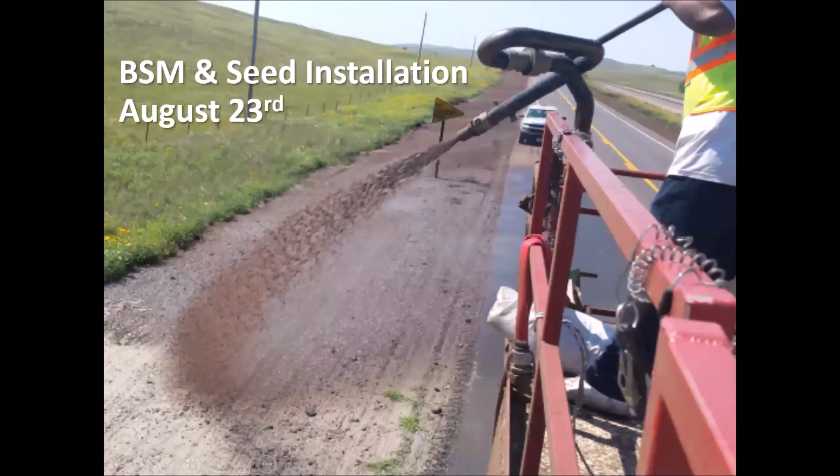Just for reference, mixing this Proganix up in the hydroseeder, we see this rich brown slurry here on the bottom left. So installation was August 23rd. They were able to cover all 25 miles in just a couple days. This was the contractor's first time with this application and was pretty pleased with how easy it was to mix and shoot.

So again, just wrapping up these roadside shoulders. And then here we are, October 10th. For these particular areas, they weren't expecting much erosion, and given the location and materials they had on hand, the erosion control protection they went with was blown straw that was then crimped into those roadside ditches.

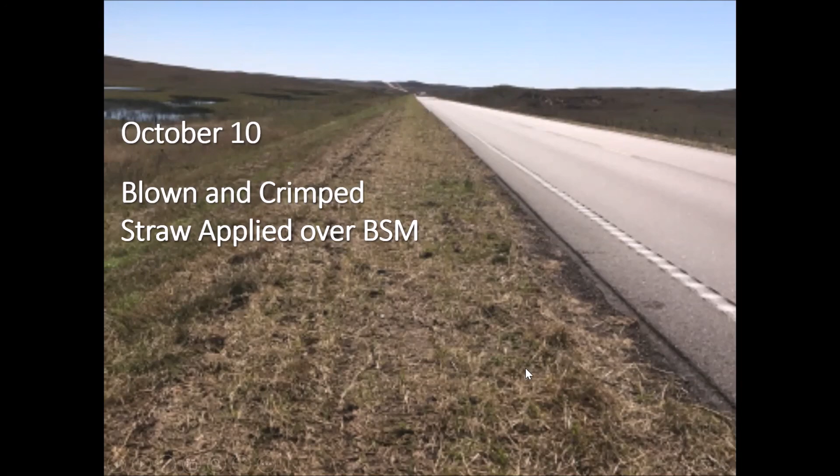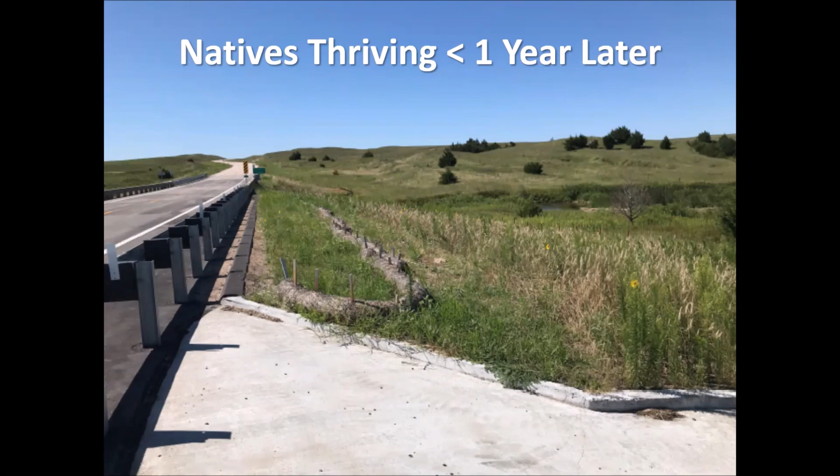Returning to the site less than a year later, all the native seeds that were seeded are thriving. Really thrilled with how quickly everything could get established. This picture is really telling because you can see a pretty clear distinction: the bright green to the left shows those roadside shoulders seeded with Proganix compared to the other areas that were already seeded. So we can see this clear line and how quickly and healthy this vegetation has been established with the aid of Proganix just 10 months after install.

So just to wrap things up, all of these fundamentals are very important, and we find that following this approach sets us up for success and is a really great practice to integrate on your project - doing that soil test, really reviewing our plant species and erosion control selection, and ensuring proper installation. PS Cubed is a great resource to follow this.